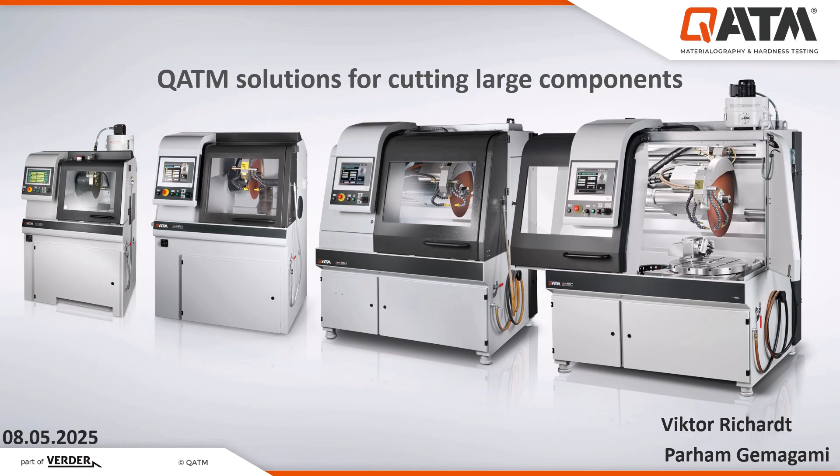Today, I will show you how QATM can support you with its solutions and options to cut large components. My colleague Viktor Richardt, who works as application specialist at QATM, supported me to prepare this presentation.

The first example is cutting a pressed-on hose connection, which is a very long sample and is a mixture of rubber and metal parts.

The second example is cutting the casing of a gearbox from a packaging machine, which is a very large component with very large dimensions, and here to cut the samples without often reclamping the sample is a challenge.

The third example is cutting a cast pipe made of chromium nickel alloy. The alloy itself is a challenge, and we should use the right parameters with the right consumables and right machine to get the best results.

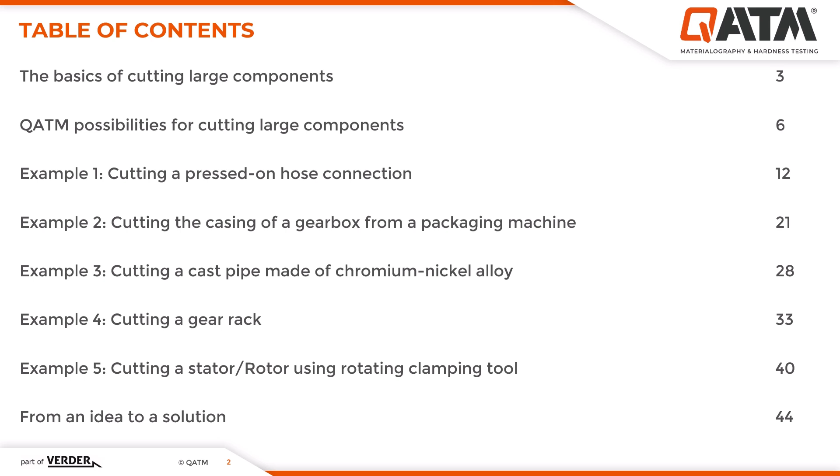Now I start from the basics of cutting large components. First, we should define the different terms here. What do we mean by large components, and what do we mean by cutting?

The second point: what do we mean by cutting? By cutting we mean wet abrasive cutting. For wet abrasive cutting we need the cutoff machine and also the cutoff wheel. We use cooling to cool the sample and the cutoff wheel during cutting. Compared to milling or sawing, we have minimal deformation, which helps save on consumables and energy costs, as well as on the next steps like grinding and plane grinding, and sometimes we can investigate the sample directly after cutting.

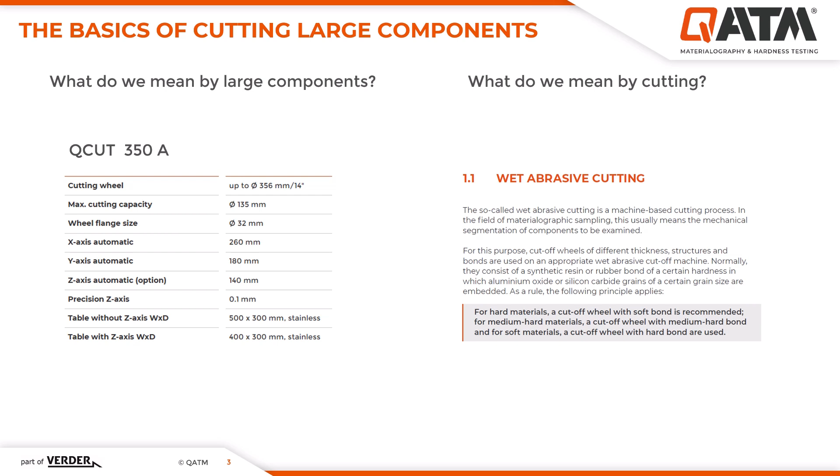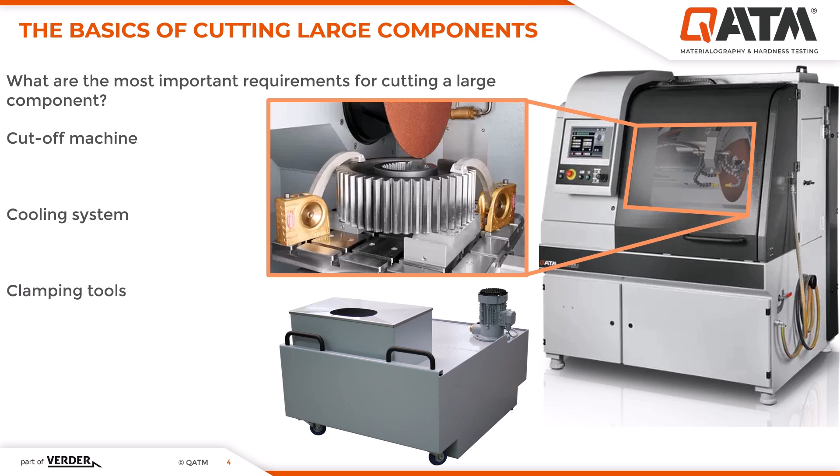Another requirement is the clamping tool, which we use to clamp and fix the sample on the table so it does not move during cutting. We have over 100 clamping tools at QATM that we've used for our customers, and now we can also use them for future projects.

Another important requirement for cutting a large component is the consumable, like cutoff wheels. As you can see on the right hand side, the table shows which consumable and cutoff wheel is appropriate for which material with different hardnesses.

For non-ferrous material, we have SIC resin bonded cutoff wheels, and for harder material up to 700 Vickers, we have aluminum oxide resin bonded wheels. At QATM, we also offer diamond and CBN cutoff wheels, which I'll go into detail on in the next slides.

The other important requirement is cutting mode and parameters. We have a principle that we should always cut from the small contact area, not the large contact area. Depending on how we clamp the sample, we can choose different cutting modes, for example horizontal cut, vertical cut, step cutting, zigzag, diagonal, or rotational cut. From the next slide, I can go through each requirement in detail, and we can discuss it together.

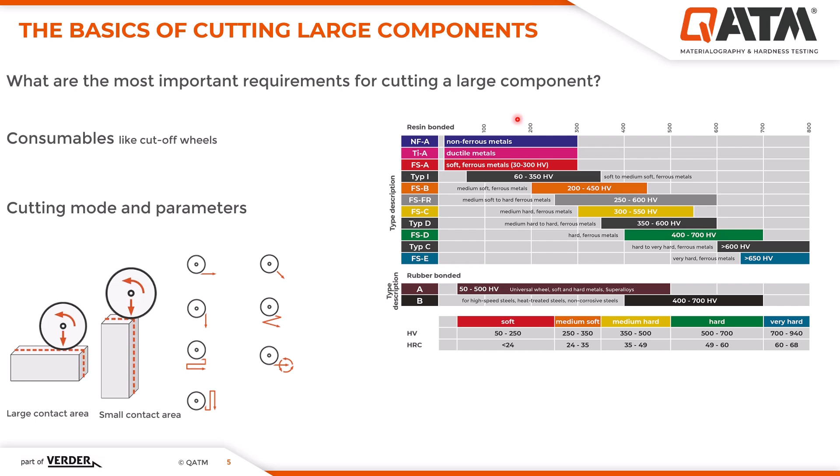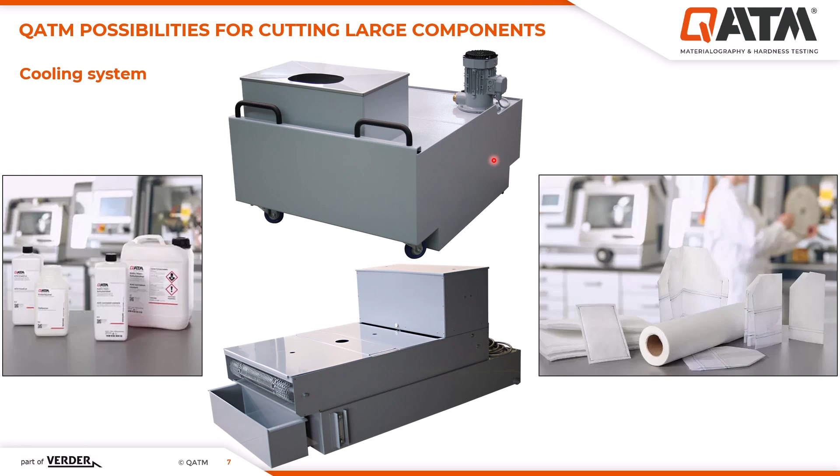Cooling system: as you can see in the QATM, we have the recirculation cooling unit on the upper side, which for the stand machines is 120 liters of recirculation unit. Also, as you can see on the bottom side, we can also use the band filter.

In QATM, we can also offer different anti-corrosion coolants. We use water with approximately 5% of the anti-corrosion coolant, then mix them together and use it as the coolant for the cutting.

The other thing we should use for the cooling system is the filters. In QATM, we can offer different filter cloth and fleece from 800 micrometer to 60 micrometer, and with different dimensions. When you cut the samples, you fill the rest material from the cut-off wheel and from your sample, then the water with anti-corrosion coolant comes to the recirculation unit and we pump it once again to the cutting machine.

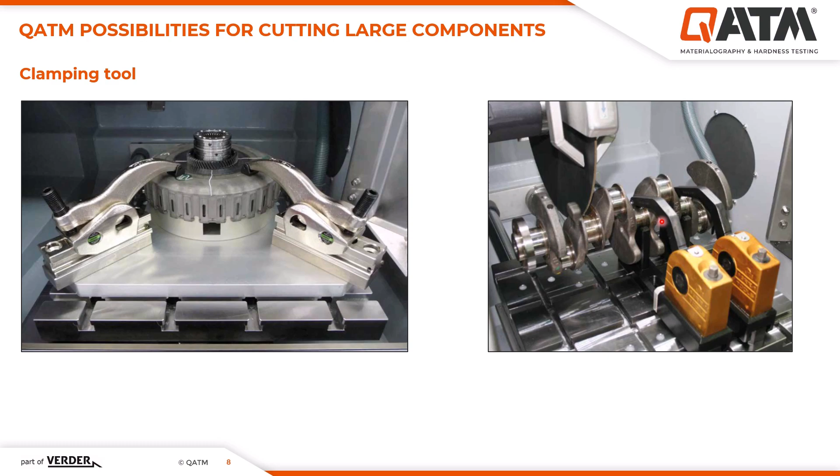On the right hand side we see the crankshaft clamping device. It's a mixture of universal clamping with some supports, and it's also designed exactly for the crankshaft. The other examples we can see here are the CFRP and GFRP panels

clamping tool. With this clamping tool in QCut 400A, we can clamp the plates and cut the samples to produce plates for the tensile or compression test.

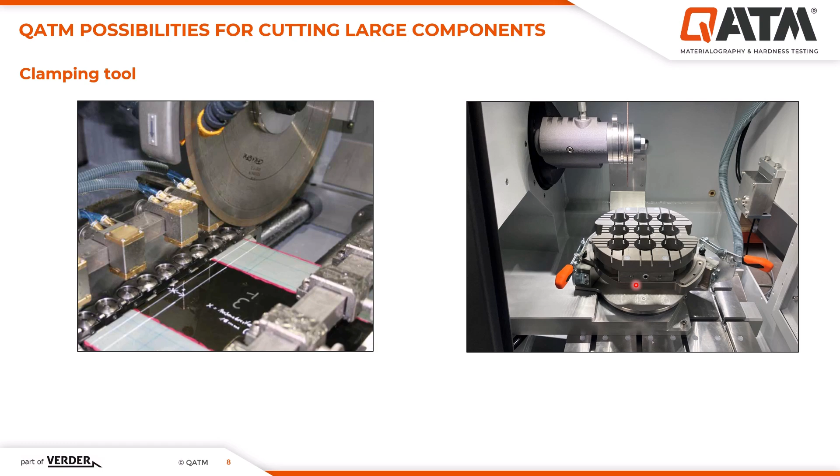On the right hand side, you can see the special clamping tool for the batteries, where 9 lithium batteries can be placed in this clamping tool, and with one screw we can clamp the samples and cut the samples on the cap of the battery.

The other example is the clamping tool X-Clamp. In this clamping tool, you can clamp samples with irregular forms.

As you can see, like stones, here you can see the blade and also the samples that with the normal clamping tool are very hard to clamp. Here with this clamping tool, we can avoid the sample moving during the cutting.

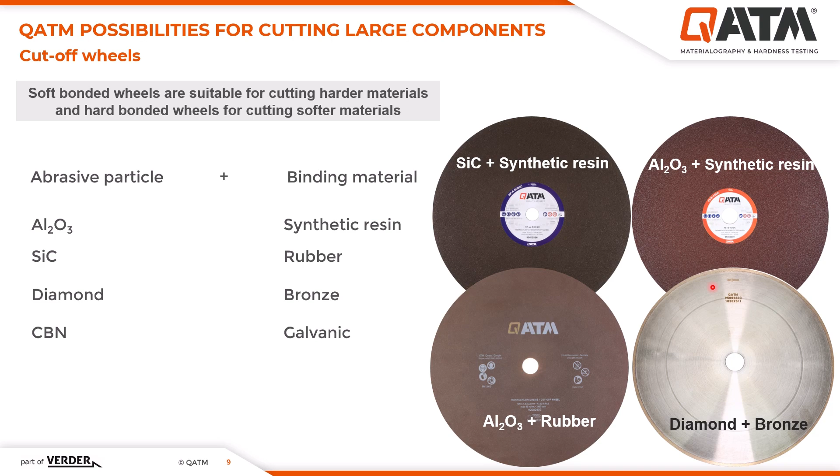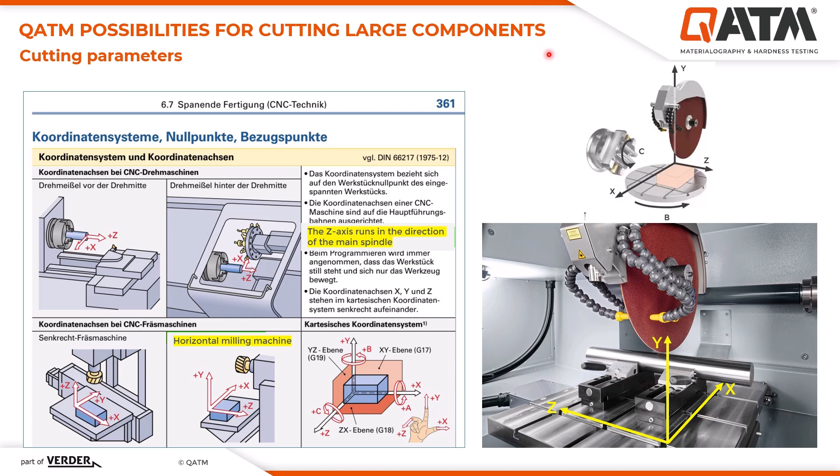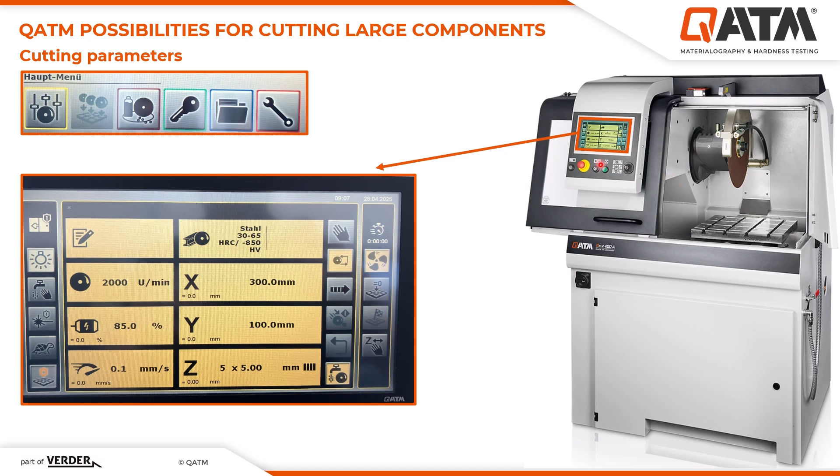The other place you can set the cutting parameters is the display of our machine. In the display, we have the main menu, which contains the parameter menu, and we have the multi parameters process.

We have the consumables and material definition, and accessibility settings where you can give access to different people like the operator, administrator, or service technician. Then we have the menu for saving and loading the programs and the different settings.

Now I want to show you the parameter menu. In the parameter menu, you have the different parameters that you can set to have the best results.

As you can see in this display, you can also set the rotational speed of the cutout wheel. You can set the motor power, and with this motor power limit, you can also control the feed speed.

This means that when you set 85% for the maximum motor power, and you set the cutting feed to 0.1 millimeter per second or 5 millimeters per second, if your cut is too high and needs more power from the motor, to protect the motor, the machine adjusts the feed speed itself.

Then we also have different axes, and depending on which cut you choose, you can set different parameters. For example, as you can see, here is the actual position, and here is the final position.

This means that from this position, the machine should move 300 millimeters in the x-axis, 100 millimeters in the y-axis, and here is the parallel cutting. After the first cut, the machine performs 5 different cuts, each sample 5 millimeters.

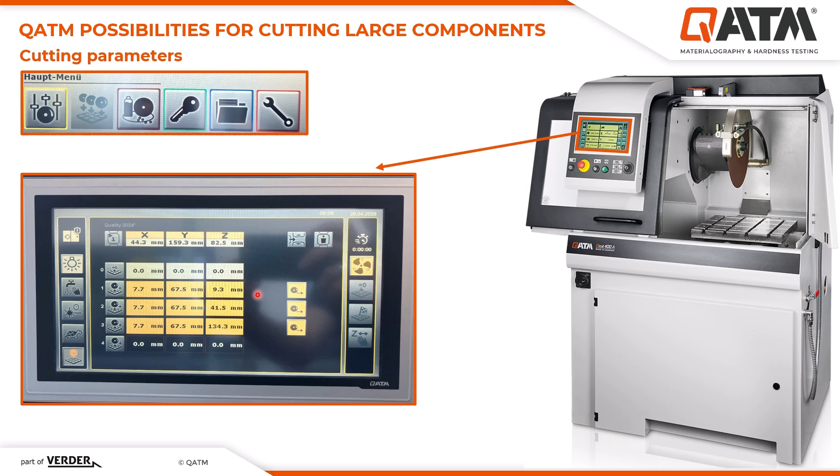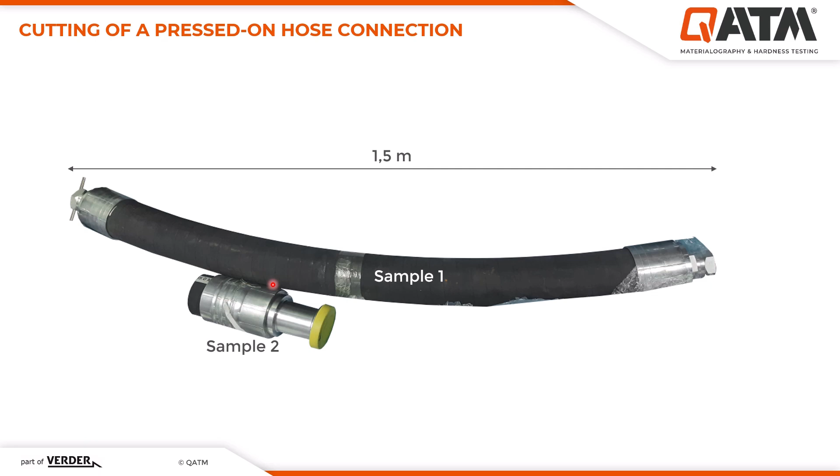Now I want to show you how with the appropriate parameters you can have the best results. In each example, we start with the machine and go to the parameters and clamping options.

Also, you have safety features. It means that when you cut the sample, you cannot open each door, because the doors have sensors, and you cannot open the doors. They are all locked.

The other feature is laser alignment, and we can also install the rotational tool so you can rotate your sample during the cutting.

Then, with the display and control, you can control all the features of the machine. You can also use the MPP program, as I said.

You can do the pulse. It means that during the cutting, the table moves, for example, 0.5 millimeter forward and 0.2 millimeter backward. With this, you can also reduce the wear and contact between the cutoff wheel and the sample.

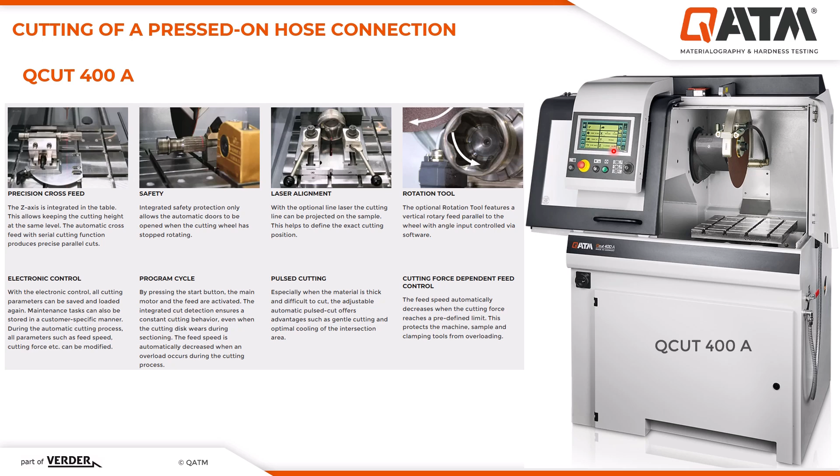The other one is the cutting force dependent feed control. It means that, as I said, we put the right motor power, and the machine can also control the feeding speed.

In this slide, we can see how we clamp the sample in the cutting machine. As you can see, because the sample is very long, 1.5 meters, we can use the hole on the left-hand side of the machine and use the extra part on the right-hand side. We should support the sample on the left and right-hand sides.

As you can see here, we can use some parts to support the sample so it stays at the same level. We can also produce permanent parts to support the sample and ensure it always has the same level. On the table, we can also clamp the sample with different universal clamping tools.

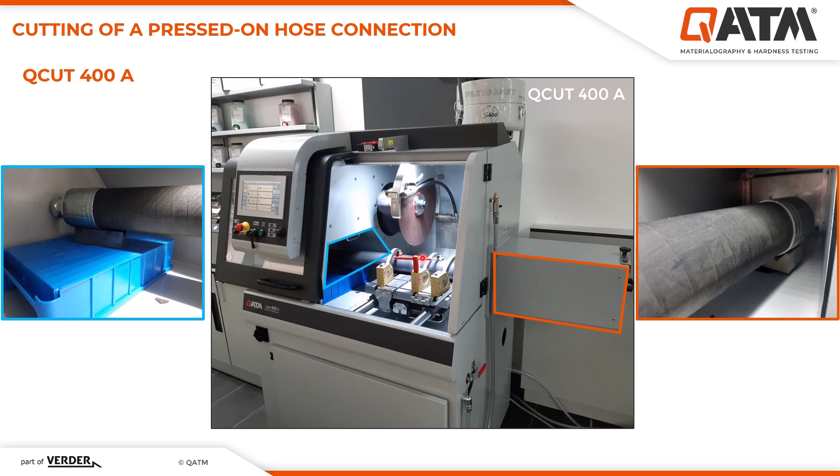Here you can see the different clamping tools. We have three universal clamping tools that clamp the sample on the table, and we can also use the slots of the table to cut the sample vertically.

With the table protect option, you can set the lowest position of the cutoff wheel, so there's no worry that the cutoff wheel can meet the table. Before clamping the sample on the table, you move the cutoff wheel to the lowest position so it cannot meet the table.

Then save this as the lowest position of the cutoff wheel in the table protect function. You can clamp the sample and set the parameters, and when the cutoff wheel comes down, or if an operator makes a mistake setting the wrong height, there is no worry—the cutoff wheel cannot meet the table. We can use this slot to cut the samples vertically.

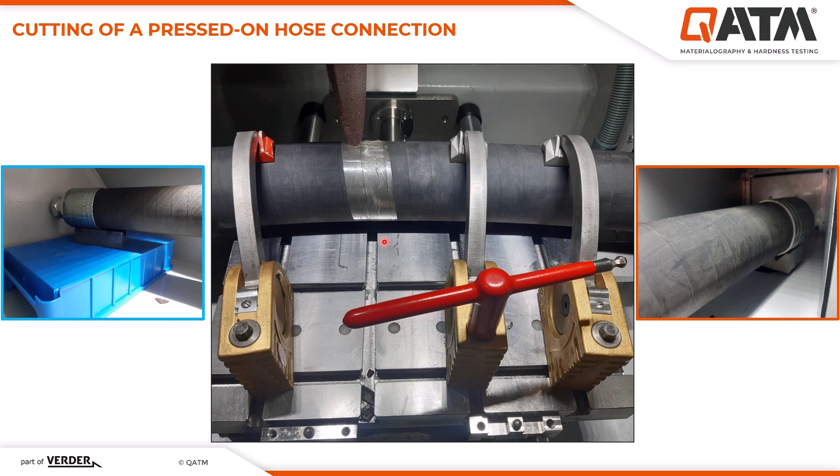Here we can see the different parameters and also the results. On the left hand side, here is a table that we use also in the reports, showing which parameters we used. The equipment was QCut 400A. The cut-off wheel is the FS-A 400, an aluminum oxide cutout wheel with synthetic resin as binding material. As anti-corrosion coolant, we use the QATM standard, approximately 5%, mixed with water.

The clamping tool is the universal clamping tool. As you saw, we use it three times, and for supporting, we use some support under the sample to keep the same level. Here we can also produce permanent metallic supports, or you can use some supports to just put the sample on the same level. Then the cutting method is a vertical cut.

It means that in our machines, on the y-axis, the feeding speed is 0.15 millimeter per second without any pulse, and the rotational speed is very low, 1000 round per minute. It's important to cut with a low rotational speed to avoid burning of the rubber tube. If you use a very high rotational speed, you can burn this rubber or deform it.

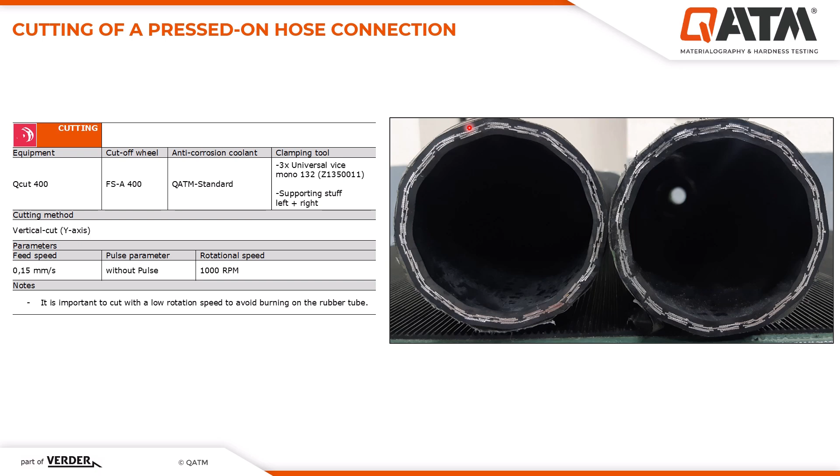As you can see in the results after the cutting, the rubber did not deform, and you cannot see any smearing of the rubber on the metallic wire. The metallic wires are also very plain, and you can see that the cut is a plain cut without smearing or deforming the different parts. Here is the right result for the next step.

That can be plan grinding, or sometimes you can also investigate this profile directly after cutting under the stereo microscope.

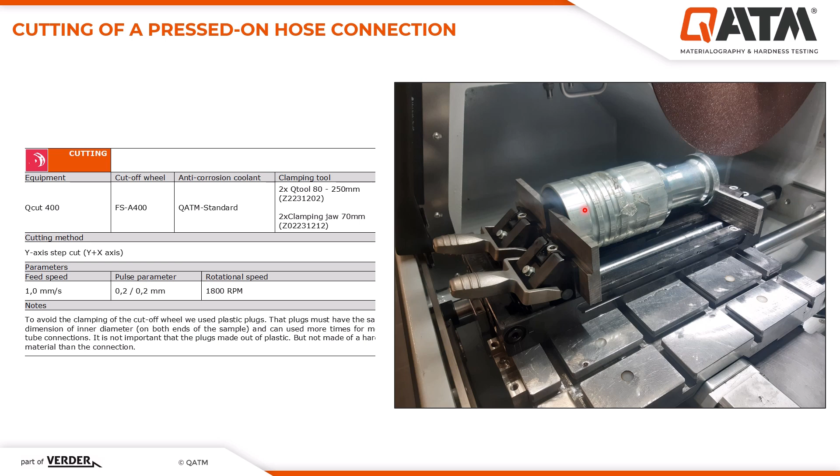Here is the second sample, also a combination of rubber and metal parts. The challenge here is that when you do the longitudinal cut, both sides of the sample can clamp together and stop the cutout wheel, which can also break the cutout wheel.

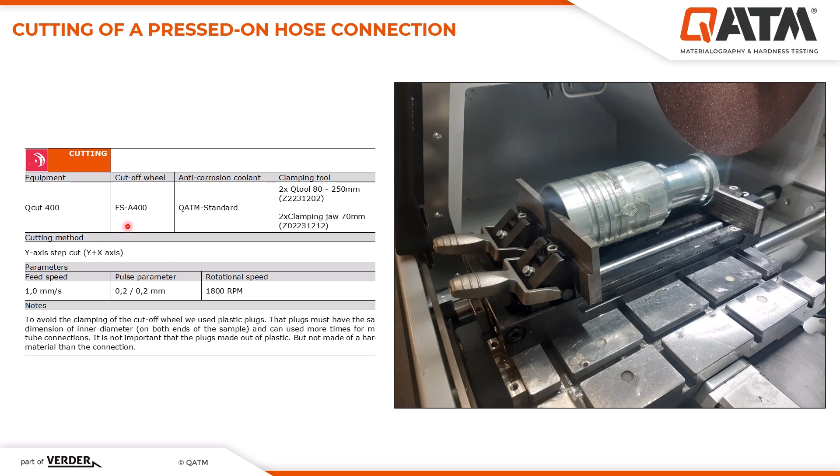As you can see on the left hand side, the equipment is the same, QCut 400A, the cutout wheel is the same, FSA 400, and the anti-corrosion coolant is the same, QATM standard, but the clamping tool is QTool 80.

QTool 80, as you can see, comes with different clamping lengths. Here it's 250, long enough to clamp the sample, and you should also use the other clamping jaws. Our QTool 80 has the standard clamping jaw delivered with the clamping tool, as you can see here, but we also have different clamping tools for different samples.

To have the best clamping result, you can use these high clamping jaws, the 70 millimeter clamping jaw on both sides, which lets you clamp the sample correctly. Here we also use a plastic stopper, a simple mounting material, to stop both parts of the sample from coming together, clamping, and stopping the cutout wheel.

The cutting mode is the y-axis step cut. It means that you do the vertical cut, but with x step cuts. Also, the feeding speed is 1 millimeter per second, much higher than the feeding speed used for the other sample, and here we also use the pulse parameters.

It means that we pulse the table 0.2 millimeters forward and backward. The rotational speed of the cutout wheel can be 1800 RPM, much higher than for the other sample, because here the rubber parts are not as thick as in the other sample. We also use plastic plugs, as I said, to stop the two parts of the sample from coming together.

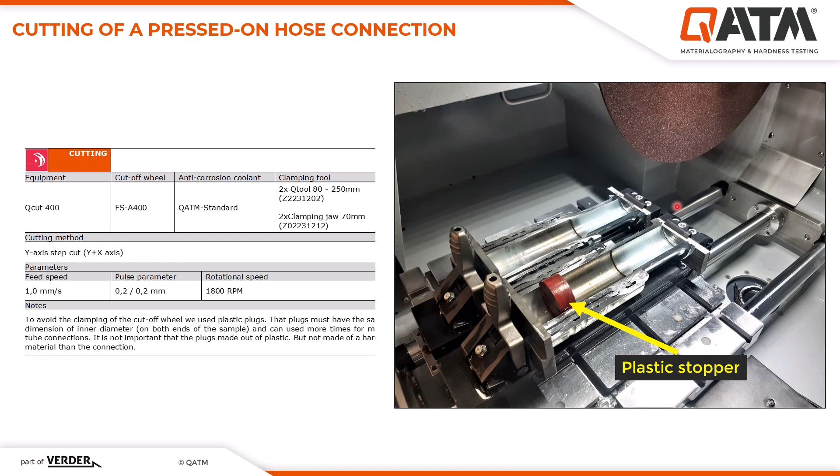As you can see, here is the sample after cutting, and here is the result. Here is the plastic stopper that we used, and as you can see, the longitudinal cut can be carried out without any problem. Here you can see the results.

As you can see here at higher magnification, after the cutting you do not have any smearing of the rubber band on the metallic wire, and no deformation on the metallic wires. When you deform your material, you cannot see the wires individually like this, and you smear different parts onto each other.

Then you should also spend time plan grinding and grinding away all the deformation from the cutting. With this cut, using the right parameters, without any smearing or deformation, you save time on the next step. Sometimes the customer wants to see the profile under the stereo microscope, or with some artificial intelligence programs, directly after the cutting, and you can investigate the sample and its profile right away.

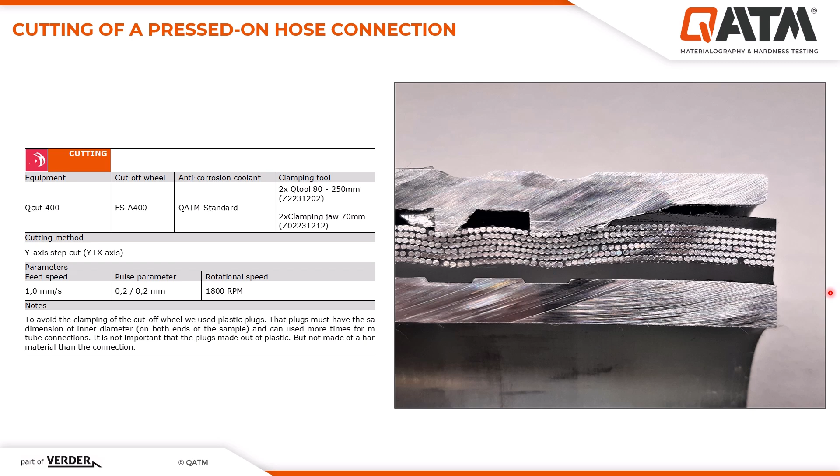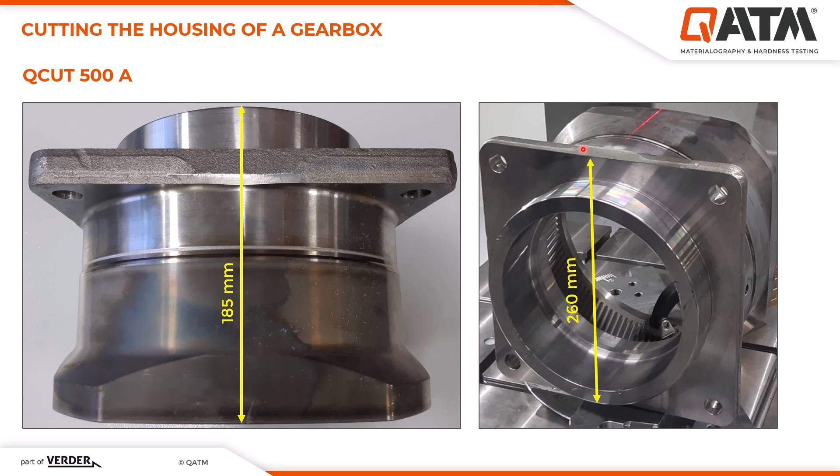As the last example, we start from the machine. We show you the clamping options, the different parameters that we use, and after all, the results.

We start from the cutting machine, the QCut 500A. Here also we have some features that can help us to have the best results after cutting. At first, the automatic axes, the automatic X, Y, and Z axis. Also, we have the high dynamic drive up to 80 millimeters per second. Also, the multi-position process can help us to have the different cutting without reclamping the sample.

We have also the cutting force control and also some other features like saving the program after putting the right cutting parameters. Also, we have the sliding door with a very big window that we can see all the details during the cutting, and also the extra door on the right-hand side that with opening it you can clamp the big samples in the cutting room.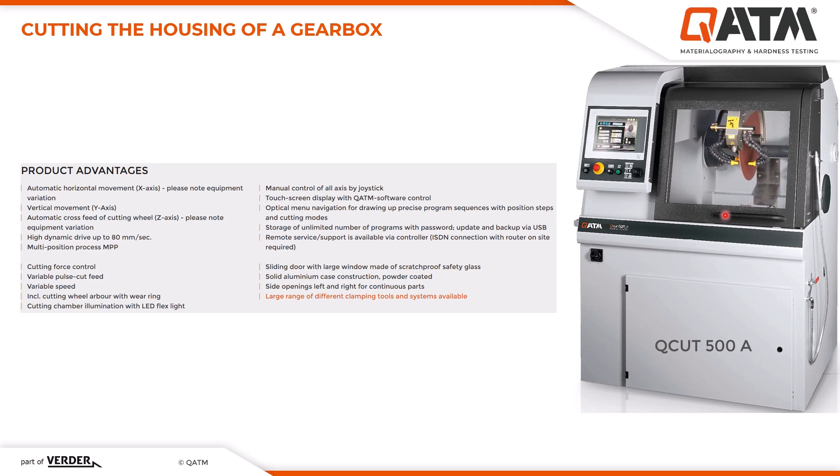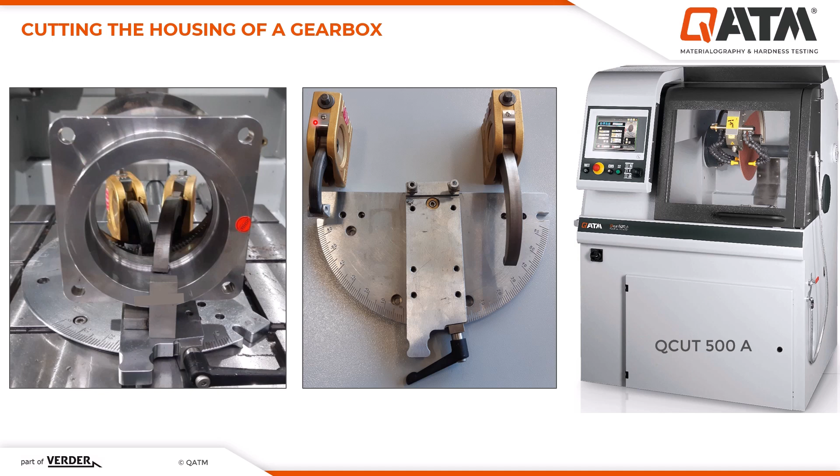When we are going to the clamping parameters, here we use the swivel plate as you can see on the table, and also two universal clamping tools to clamp the sample on this swivel plate. This swivel plate is a swivel plate with 2 times 60 degrees. It means that 60 degrees on each side. And when we want to rotate the sample 90 degrees, we should clamp the sample on the one side on the 30 degrees.

But we can also produce the different swivel plates with different degrees, 60, 70 or 90 degrees. As you can see here, on each side we have 60 degrees, and when you want to rotate the sample 90 degrees, you should clamp the sample on the 30 degrees on one side with two universal clamping tools.

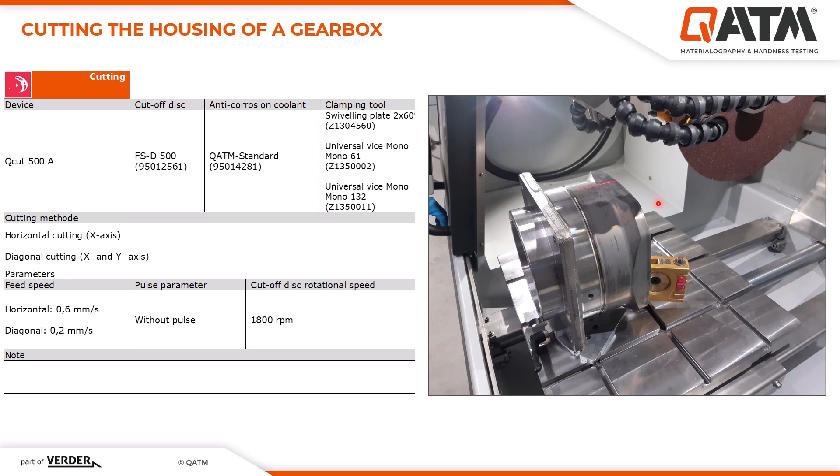Now is the time for the first two horizontal cuts. It means that with the parallel cutting, you can also do two cuts without changing the position of the sample.

As the last example, you can see on the left-hand side the parameters. The device is QCut 500A, the cutoff wheel is FS-D 500, which is the aluminum oxide synthetic resin binding, appropriate for the middle hard samples. We use 5% anti-corrosion coolant. The clamping tool is the swiveling plate, 2 times 60 degrees, and two universal clamping tools.

The cutting method is the horizontal cut for the two first cuts, and then we need one diagonal cut to put the sample out of the part. You can see the feeding speed that we used is 0.6 millimeter for the horizontal cuts and 0.2 millimeters for the diagonal one. We didn't use any pulse for the table, and the rotational speed of the cutoff wheel is 1800.

Here we can see the sample after the first two cuts. This is the parallel cuts that we used on both sides to put the sample out of the part.

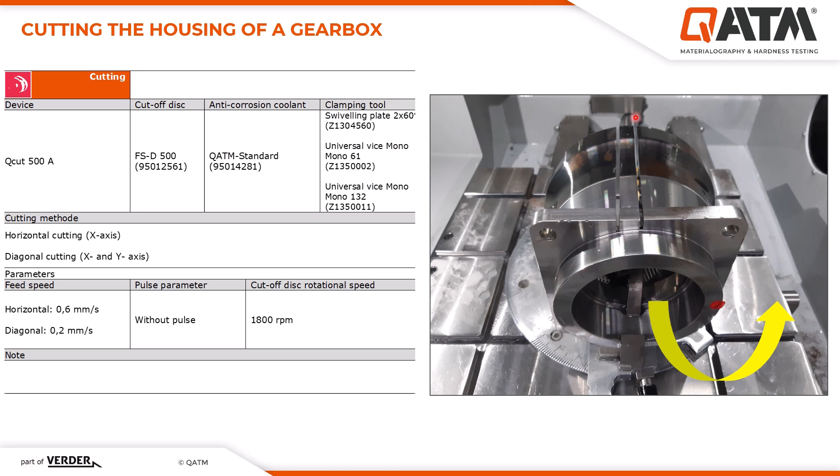Then we should rotate the sample 90 degrees. And after that, we can do the diagonal cut to put the sample out of the part. After rotating the sample 90 degrees with the laser alignment, you can align the sample to the right position, and now we can do the diagonal cut. After doing the diagonal cut on this part, the sample comes out of the part.

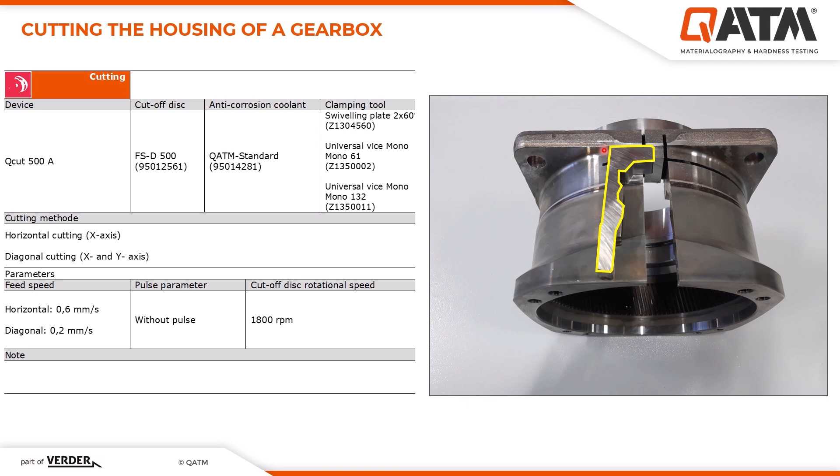Here you can see the sample. As you can see, the parallel scratches on the sample show that we have a very plain surface after the cutting. Also, on the edge of the sample, you cannot see any break or any deformation. This sample is a very appropriate sample to start the next step, which can be the plane grinding.

The third example is cutting a cast pipe made of chromium nickel alloy. Here also, the challenge is the dimension of the sample. The pipe is 430 millimeters long and 190 millimeters diameter. As you can see here, the quality of the edge of the sample and the outer diameter is the casting quality, and there can be some challenges for the cutting.

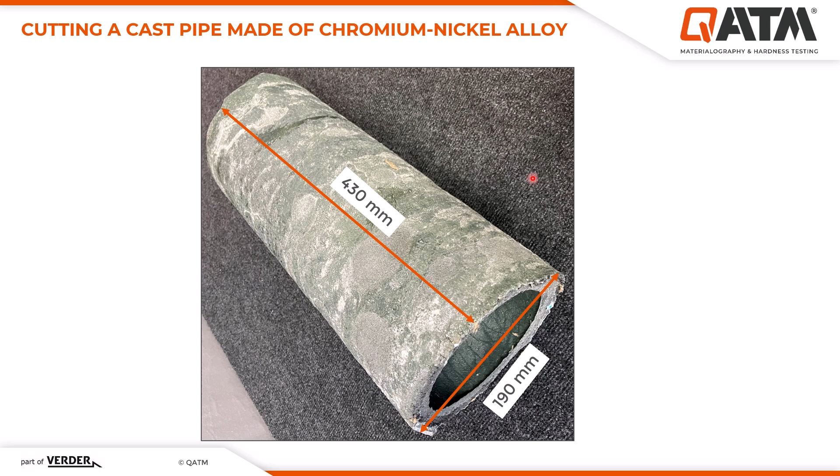As the other examples, I start from the machine. We are going to the clamping options, we see the parameters, and after all, the results.

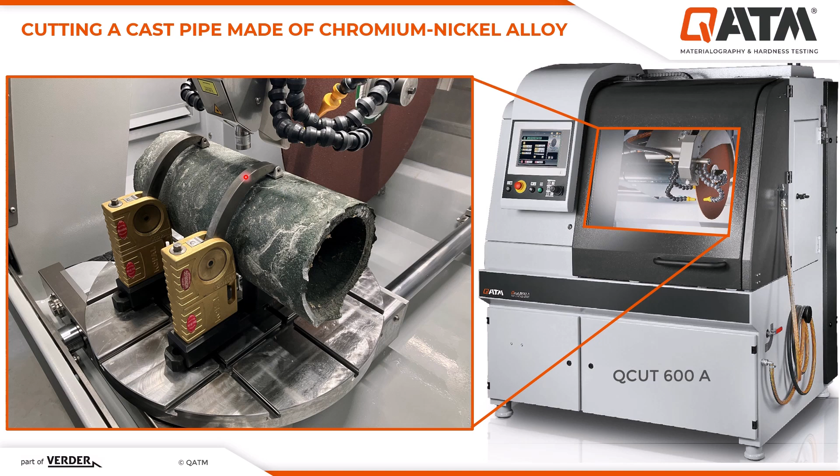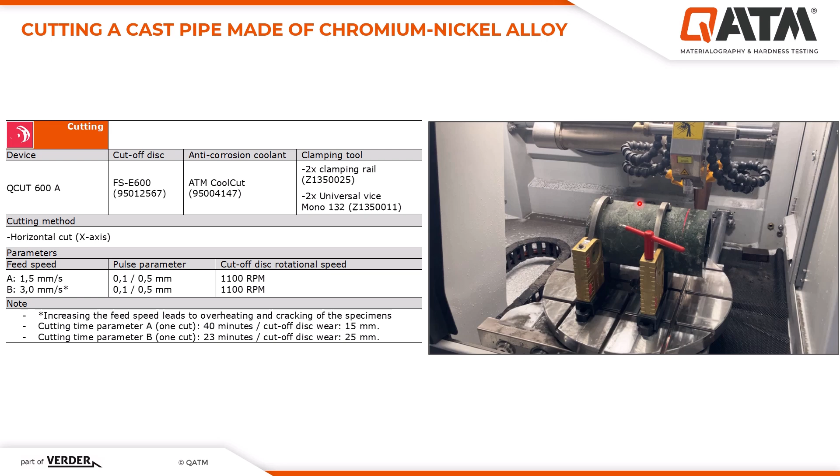We use the FSE 600. This means there is aluminum oxide with synthetic resin binding material, which is appropriate for hard material with soft binding material, and the diameter is 600. We use the QATM anti-corrosion coolant, and then we use the clamping rail on the table for support, and also two universal clamping tools to clamp the sample completely.

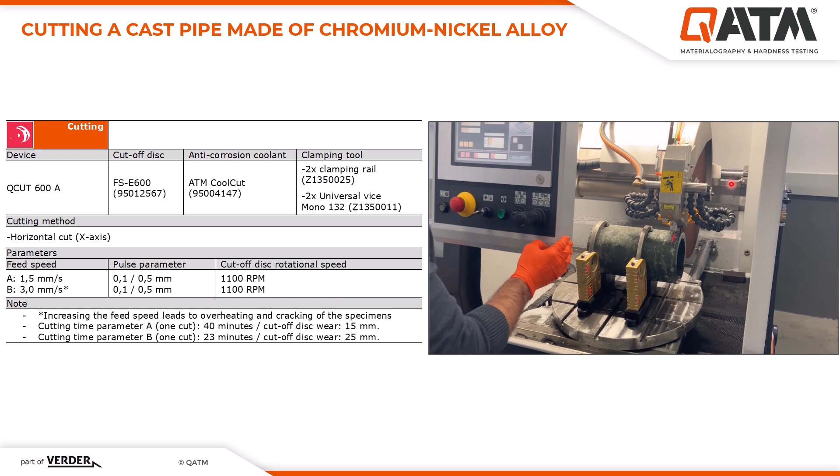With the parallel cutting or MPP position, you can do parallel cutting, or with the MPP position, you can cut at different positions to cut the rings out. Here we use the horizontal cut. This means the table moves in the X direction, the cutoff wheel is constant, and we cut the sample in this direction.

The feeding speed can be 1.5 millimeters up to 3 millimeters, and the pulsing parameter is 0.1 forward and 0.5 millimeter backward, with the rotational speed of the cutoff wheel at 1100. With increasing feed speed, we can overheat the sample, and sometimes there are cracks on the sample.

Also, with a very large feeding speed, the wear of the cutoff wheel is also more. As you can see, with 1.5 millimeters, the cutting time is 40 minutes, but the wear of the cutoff wheel is 15 millimeters, and you don't have any overheat. But when you use more feeding speed, like 3 millimeters, the cutting time can come down to 23 minutes, but the wear of the cutoff wheel can be 25 millimeters.

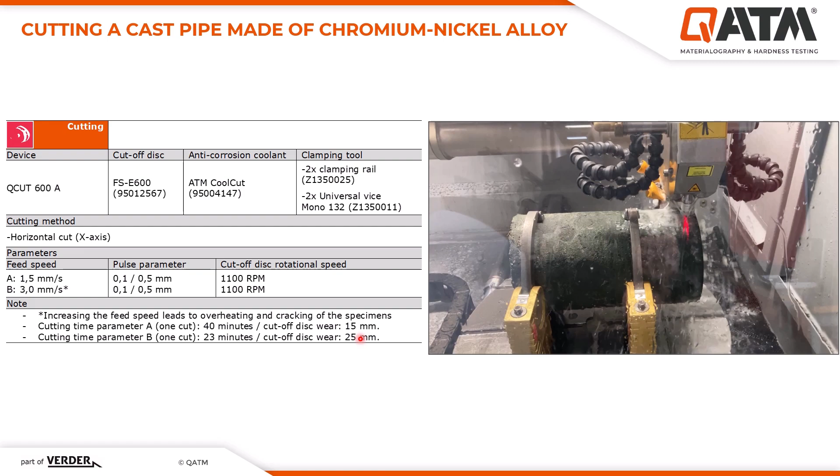Then we can decide which of these is more important for us: the time, the wear of the cutoff wheel, or the quality of the cut.

As you can see here, these are the results after the cutting. You can cut different rings without reclamping the sample. Also, you can cut rings on different parts of the sample, or with the MPP position, you can program the rings in the positions you want, for example on two ends or everywhere on the sample.

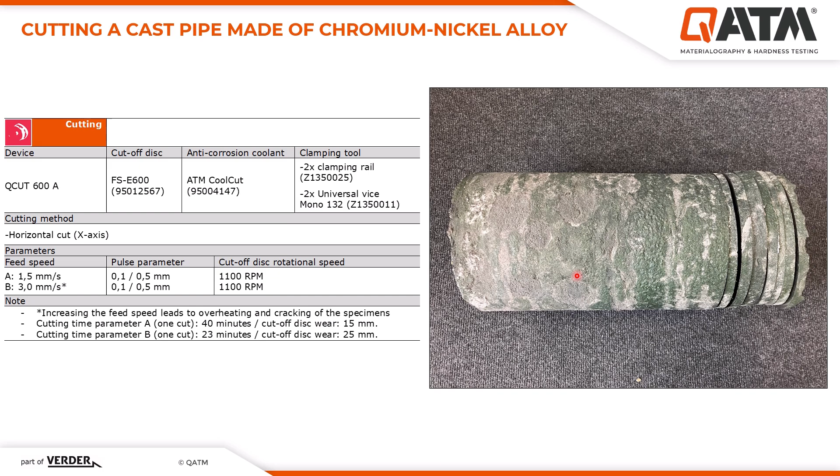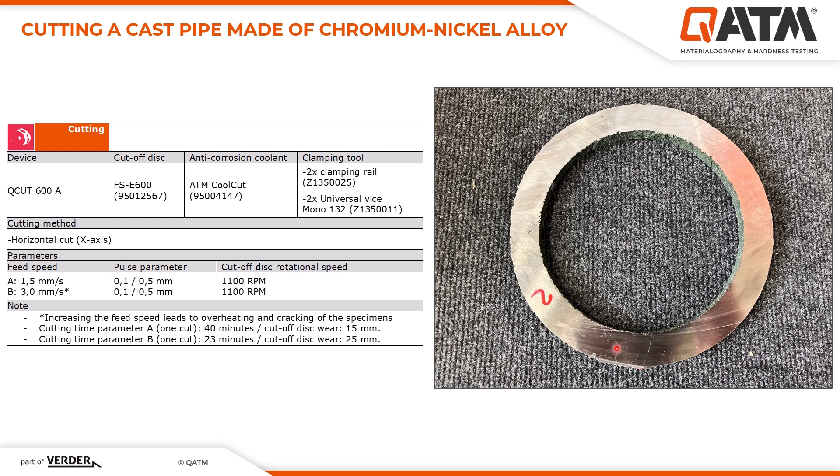Here is the quality of the ring after the fast feeding speed. As you can see, we also have plan cutting, which lets us do the cutting much shorter, but the wear of the cutoff wheel can be higher. As you can see here, these are the results after the cutting. We have the plan surface that we can use for plan grinding, and we can save time on the second step, which can be plan grinding or rough grinding.

Here we should not reclamp the sample, because in this case we use the QCut 600, and with the MPP program we can do the longitudinal as well as parallel cutting without reclamping the sample. The same sequence applies for the other part of the sample: one longitudinal cut and then the parallel cuts to get some racks out.

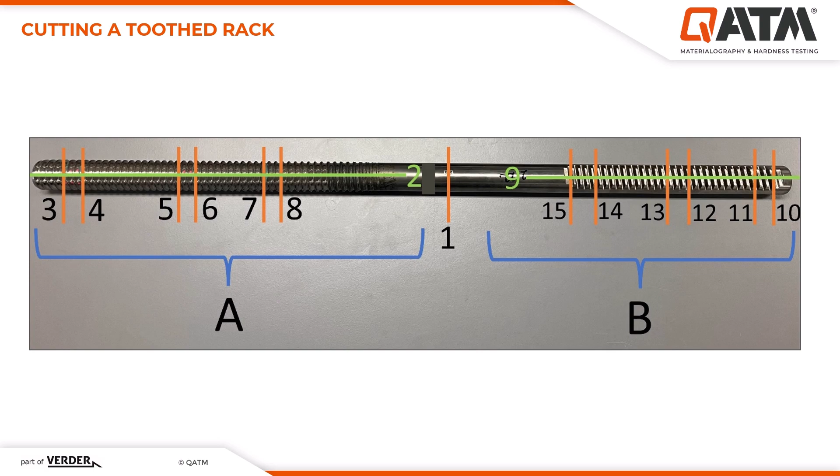This means that after cutting, the machine can measure the diameter of the cut-off wheel and can also set the parameters once again itself.

We have the same options in the 500A, and for the 400A there is a special design. This means that in the QCut 400A, you can also have the automatic cut-off wheel measurement as a special offer. But for the 500A and 600A, it's an option you can buy with the machine.

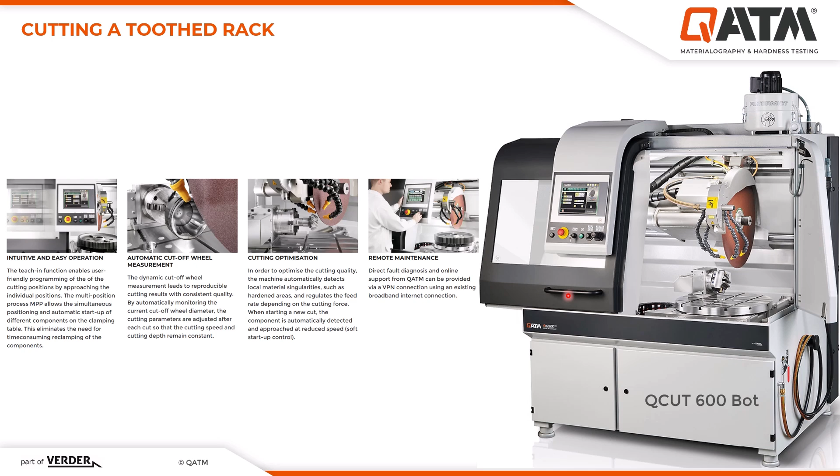You can also have remote maintenance. This means that when there is a fault on the machine, direct fault diagnosis and online support from QATM can be provided via a VPN connection.

In every case, a special clamping device is also available. This means that after cutting the sample, when the customer wants an exact and special solution for that sample, we can design a clamping tool especially for it. Most of our clamping tools today were originally special clamping tools designed for customers before.

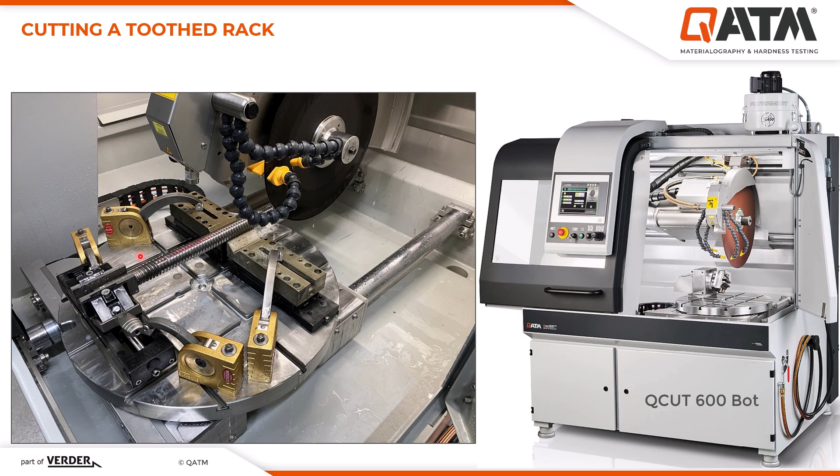As you can see, we clamp the sample on one side, and on the other side we just put the sample on the clamping devices, on support devices, to keep it at the same level. Then we can do the longitudinal cut.

Like the other examples, we start with the parameters, shown here in this table. The device is the QCut 600, but just for 4 axes. We have the rotational table, but no rotational clamping tool.

We can also use different cutoff discs, FSC 400 or FS-D 500. In our machines, the maximum diameter is always in the name of the machine, for example 600 here, but you can also use cutoff discs with lower diameters.

Also, the anti-corrosion coolant is the QATM standard, with an item number you can find on our website. The clamping tools are the universal vice Piccolo, which are universal clamping tools.

We have the QTOOL 80, which clamps the end of the sample, and also some prism clamping plates to further support the sample.

We also need horizontal cutting for the longitudinal cut, and also vertical cutting. The first cut divides the sample into two, and then we use the horizontal cut to do the longitudinal cut.

The feeding speed can range from 0.7 to 0.2. For high feeding speeds, we need a pulse parameter of 0.2 millimeters forward and 0.1 millimeter backward. For lower feeding speeds, we don't need any pulse.

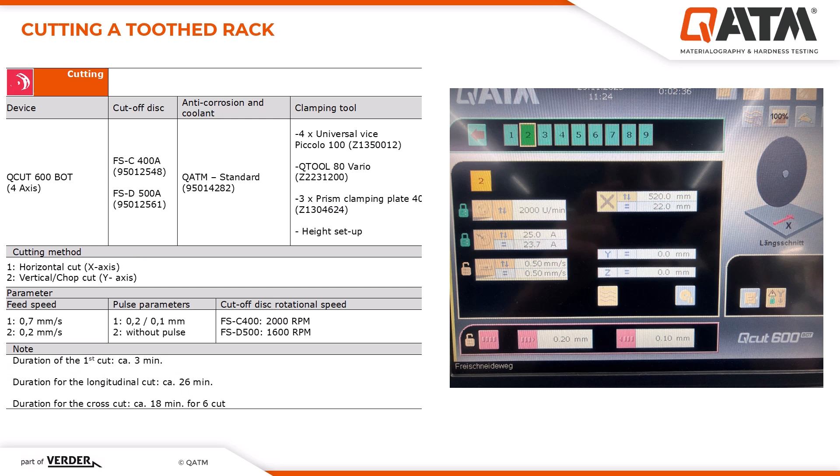The duration of the first cut, which divides the part into two, is 3 minutes. The duration of the longitudinal cut is 26 minutes, and the cross cut for 6 cuts is 18 minutes. This means each chop cut is 3 minutes, and the longitudinal cut is 26 minutes.

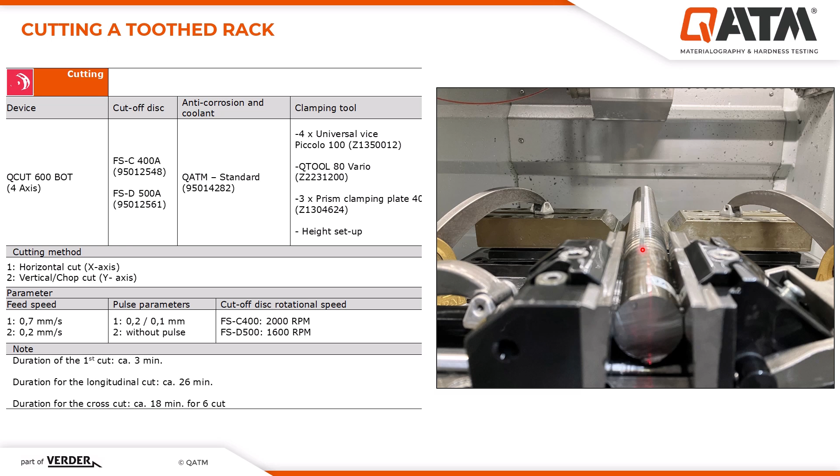As you can see here, we clamp the sample at the end with QTOOL 80, and also put 2 prisms to support the sample. Here is the longitudinal cut, which is a completely direct cut without any deformation on the sample, as you can see here.

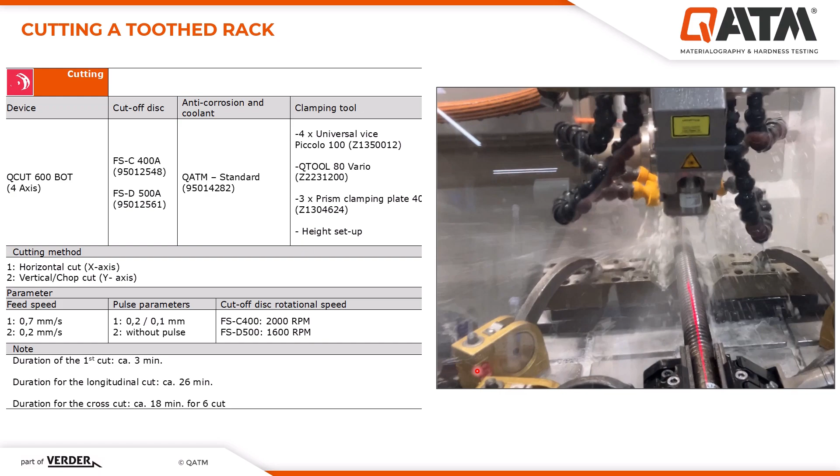In this slide, I show you a short video of how we cut the sample. Here is a longitudinal cut.

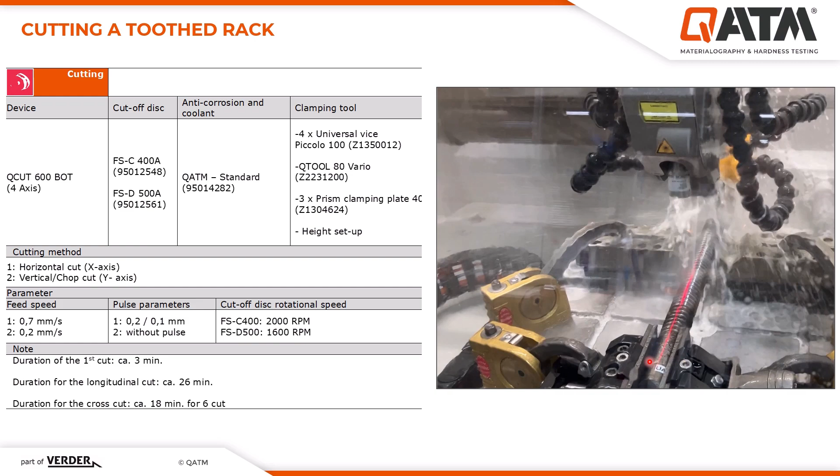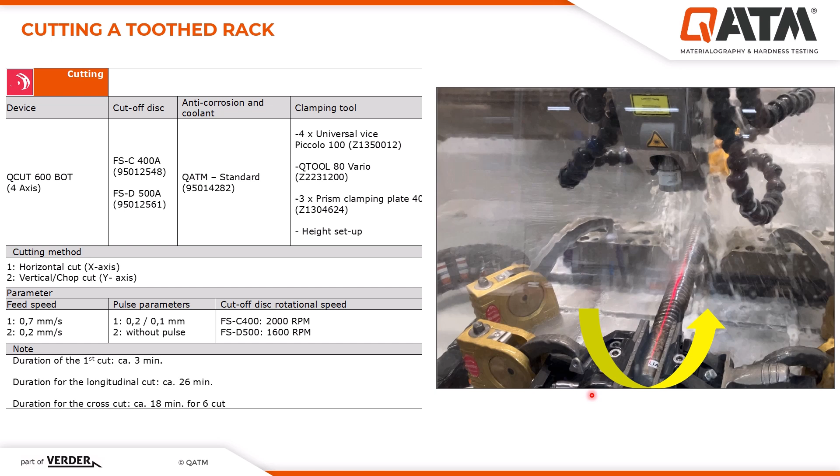After this cut, I stopped the video to show that the cut can proceed to this part. Then, when we complete the longitudinal cut, we rotate the sample with the 4th axis automatically using the MPP program, 90 degrees. Now, as you can see, the longitudinal cut is finished.

We rotate the table 90 degrees automatically with the program, without opening the door or reclamping the sample. Then we do the parallel cutting. This means one cut, then the cut-off wheel comes up, moves along the Z axis to another position, and does the parallel cutting, as you can see in this video.

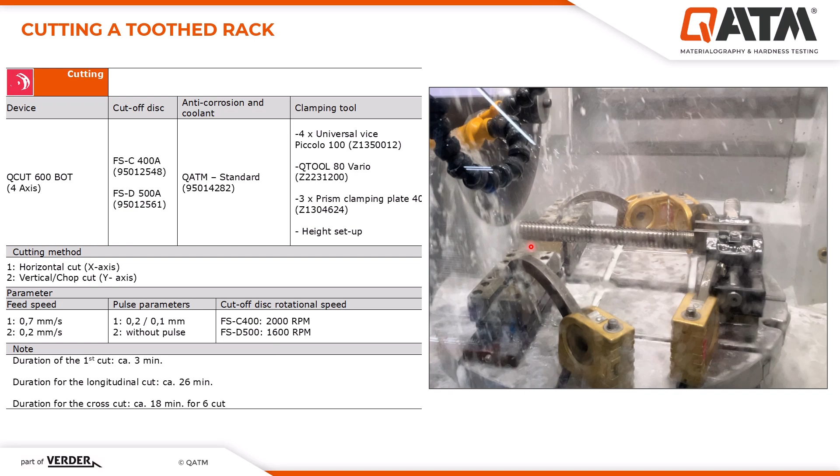After that, we can also remove all the samples from the tooth rack. Now a quick introduction on how we can cut a stator or rotor in our machines. In this case, we have the QCut 600A, which means we don't have the 4th or 5th axis. We have the rectangular table, but we can use the rotational device, which gives us one extra axis - the QCut 600A plus rotational device.

Here is the table, and here is the rotational device, which is the R axis, and then we have the clamping tool. With this clamping tool, we can clamp the stators or rotors on the machine to also rotate the sample during the cutting.

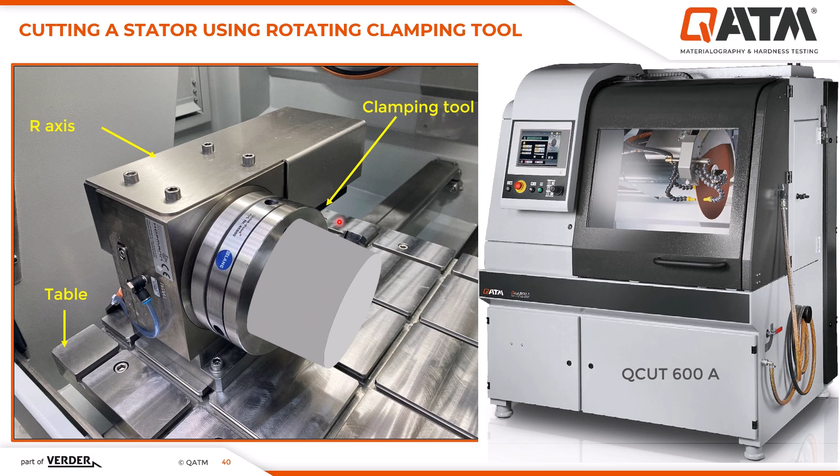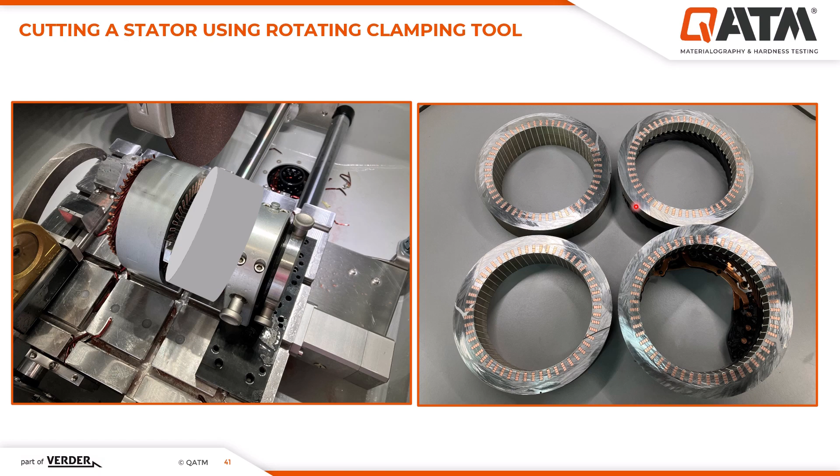Here you can see the rotational device and the sample, and after cutting, you can have the rings of the stator. Here you can also investigate the sample directly after cutting without grinding or polishing it - a great advantage for the customer, who can investigate the sample under a stereo microscope right after cutting.

In this slide, you can see that after cutting, we did not deform the different parts. For example, here is the metallic part, here is the isolation paper, here is the resin, and also the copper parts. With the wrong parameters or wrong clamping devices, you can smear the isolation paper onto the resin, and the resin onto the copper. Then investigating the copper part in the resin, or the pores in the resin, with other illumination settings is not possible, because the material gets deformed and smeared onto each other, making investigation impossible.

But with this result and with these cutting parameters, we can investigate the sample directly after cutting.

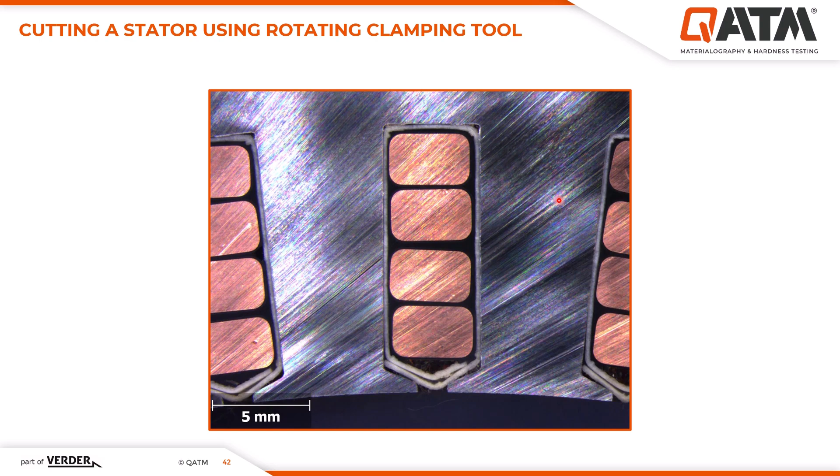The last example I want to show is how in QATM we go from an idea to a solution - cutting lithium-ion batteries on the cap of the battery. This was an idea requested by a customer for cutting the samples. The first idea was to cut one sample on the cap, and with a 3D printer we printed a clamping tool out of plastic - that was our first solution.